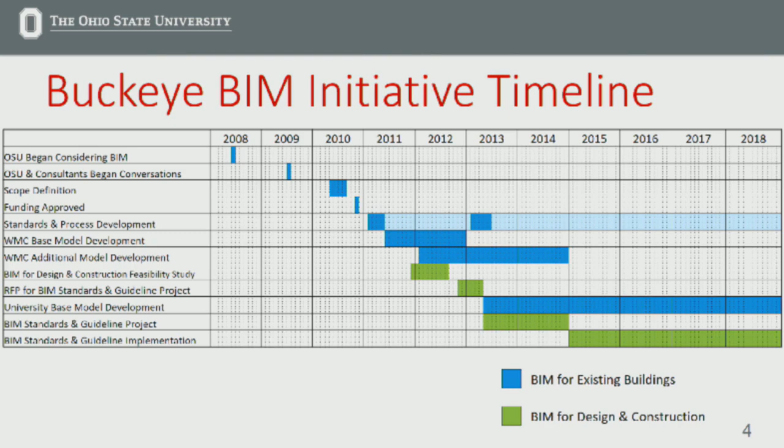So BIM for existing buildings will be much of our focus today, and we'll also cover a little bit about our BIM to BIM process. That's what we do with those buildings that come in from the larger projects, and how we get them standardized and into our system.

So a little background on the project. We started out like most people with maintaining our buildings in 2D AutoCAD. This was great for tracking space and our basic needs, but we really wanted to move towards a data-centric model, being able to understand the exteriors and adjacencies, and really having a database of information about our buildings.

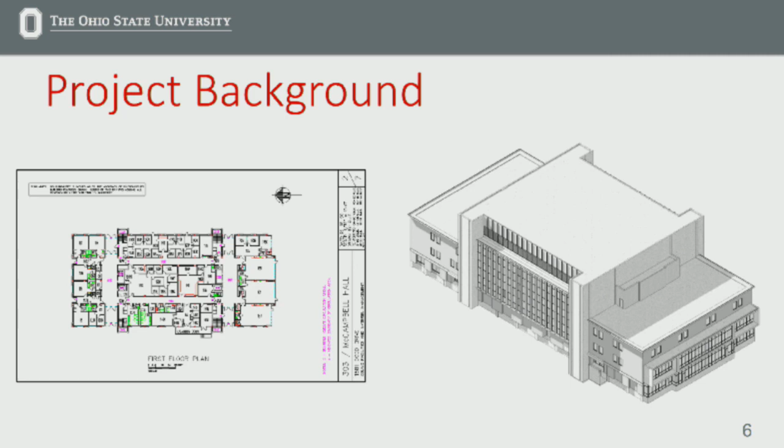So we're currently about 83% complete with the project. We have over 251 buildings and about 29.5 million square feet. We suspect this will take about 2 to 3 more years to complete our existing building stock, and that'll ultimately put us at about 35.5 million square feet.

So when we started down this path, we really had to ask ourselves, what do we need to model? What do we want in our models? And what's the stuff that we don't need? There's a lot of things that you can put in the models, but really what supports our planning and operations efforts. Our team has always been under the planning umbrella of the university, so we really focused on what helps our planners, and our general goal is how do we help people make decisions faster. But we also wanted to keep in mind what could easily be maintained. At the end of this project, we're going to have a lot of buildings, a lot of models, so we wanted to make sure it was reasonable for our team to maintain those going forward.

So we knew we didn't need everything that comes in a project model. It's not this design intent, work intent, or as-built, but it's really what we term as our as-maintained model, or owner's model.

These are the items that are in all of our base models. A lot of these were in our AutoCAD drawings. Inherently, we gained some things by going to 3D. But we've also added things like casework, plumbing, furniture, which we didn't track—like the open office areas previously—and also some equipment that was helpful for users.

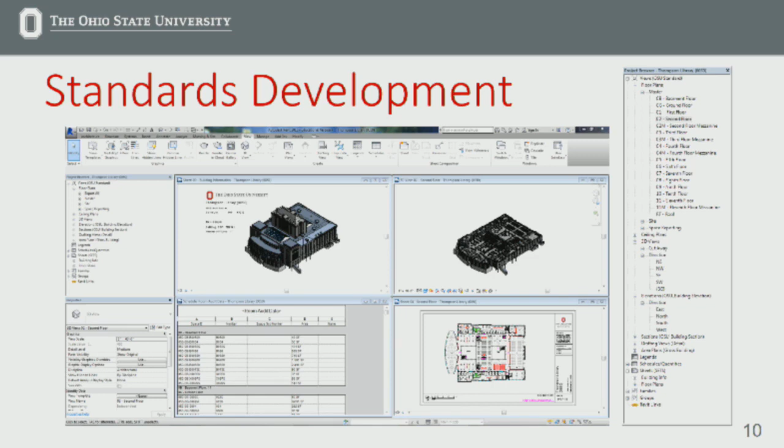This was really to help our planning teams as they started to transition and use our models. This would allow them to pull some quick pre-made views to do some of their work. We have some basic schedules, some room schedules, some equipment schedules, and obviously the standard floor plan sheet sets that you would expect to see.

We continued that standardization into all of our naming conventions too. So all of our floor plans, ceiling plans, elevations, all of those, as you transition from model to model, are all standard named. Part of the standardization is, as we knew we were going to have that large base of models at the end of this project, we wanted to make sure there was consistency from model to model, because we knew automation would play a role in our processes at some point.

And we carried the standardization naming into our family library as well. We settled on the MasterFormat, so this helps us to manage and organize our library, but it also keeps things consistent versus naming them in a descriptive manner, which can get kind of messy over time.

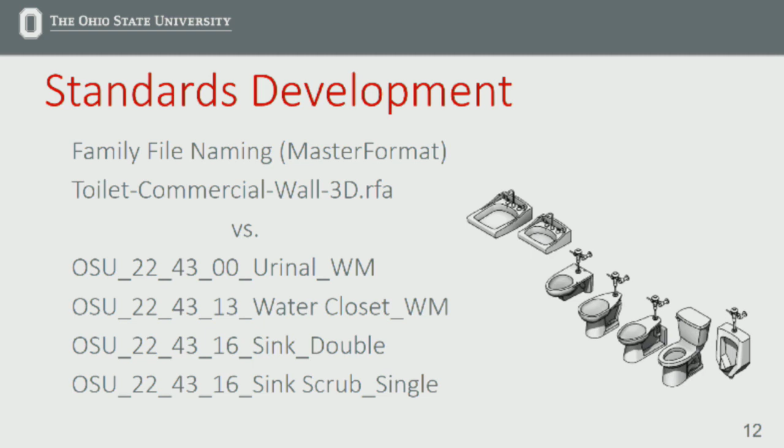We also, in regards to our families, thought a lot about what needed to be modeled. Did they need to be buildable versus representational? We settled on representational. We didn't need to know the exact make and model of the chair. Just a chair that looks similar to what you're going to find in the space is good enough for our planning needs. And the same goes with our casework and sinks and things.

They're just representative of the type of sink that you're going to find. It may not be that exact model. We also kept in mind, and tried to make as many of our families parametric as possible so they could be used in multiple ways.

But we still ended up with the amount of buildings that we have. We still have over 1,000 families, and we'll probably add more as we continue down some buildings that we haven't yet, types of buildings that we haven't modeled yet.

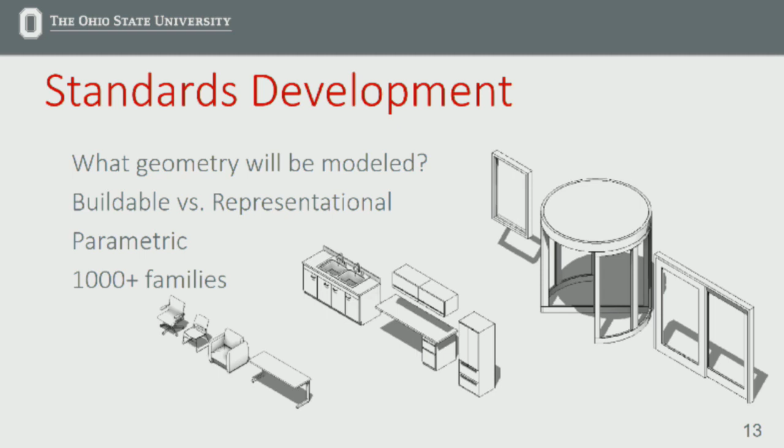So that initial gather phase, they collect our existing drawings, as-built. They go out and field verify. They come back to the office. They start building the model. Once that's complete, it goes through a series of audits.

The student starts to audit, and then it passes to Tracy for audit, and that kind of goes back and forth until Tracy says the quality of the model is good. And then it goes through the publishing process and shared out on our network and other systems that pull from there.

So with that ever-changing group of students, we've been at this for over 8 years now, so we've had a lot of groups of students. Highly documenting our processes was critical to keeping these models consistent as we go from year to year.

So we recently just moved to this web-based system, and that's also helped streamline the process. And with that, I'm going to turn this over to Tracy so she can talk in more depth about our processes.

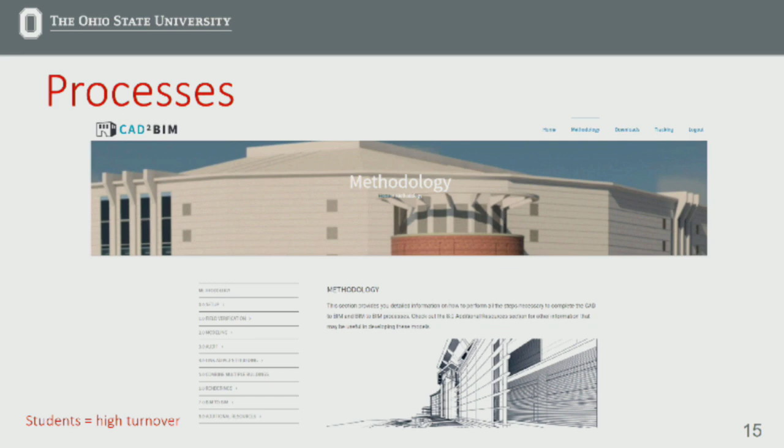After we train the students for a week in Revit, we go ahead and start with our setup process. So what I do there is I assign each student a building. I set up the folder structure, I set up the folder with the building name and number. I put the available AutoCAD drawings in there, and then I also arrange for the initial field verification.

So field verification is critical. It's one of the most important things that we do. If you don't do this right, it's going to take you longer to build your model. So I really stress that they need to pay attention and get the things they need to get.

So preparation is the first thing. What I have them do is go onto our GIS maps or Google Earth and look at the building exterior. Where is the building in relation to other buildings on campus? Are there any prominent features they need to model so they can make sure to get pictures of it while out there? They also download files from our archive site, like project drawings, as-builts, elevations, sections, that kind of information.

Next, they'll do the building walkthrough. But before that, during the preparation phase, they'll take the AutoCAD drawing and put several dimensions, usually 10 to 15 or so, within the model. They're dimensioning the length of hallways, the width of hallways, large rooms.

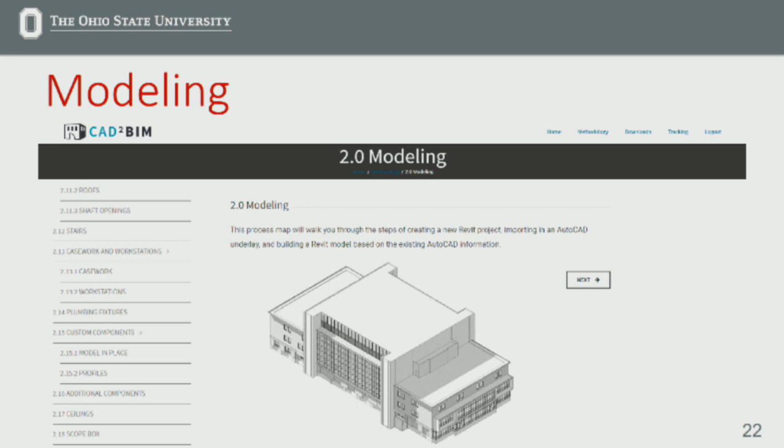When they're done with the modeling of the building, then they'll start putting in the room numbers. So this is where our space information comes from. This is how we track it. We have our room number. It's entered in here, and then Dave's going to talk about a tool that creates our space ID number, and that is where all our data is tied to, is this number here. So it's really critical that this is made correctly.

So the other thing that we do is we always have our default at 8 foot. Our space is at an 8-foot height. When our information is exported out and brought into our SIMS, our Space Information Management System, if that space is going through the ceiling and into the next floor, it's going to show on both floors in our space management system. So it's going to show on the first floor, and if the space is going through to the second floor, it's going to look like we have two room numbers in the same space.

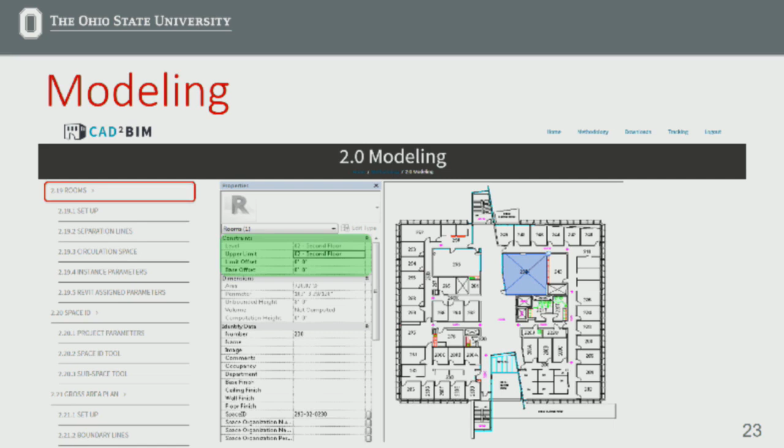So it's really important that they not change this information. So we've set it default at 8, which is a good height, so that it's not going to go through to the next floor.

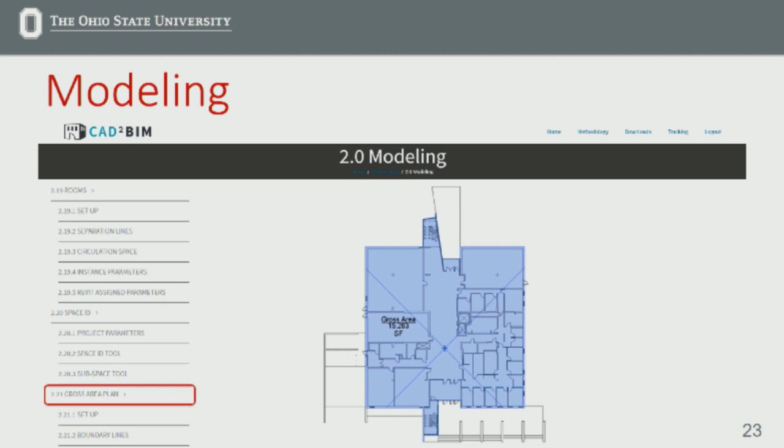We also do our GSF at this time, so we will do GSF for every floor. We have schedules already pre-set up within the model in our template, and so the schedule will take whatever GSF is on that floor. So if you have more than one, it will take those, it will add them and give us a gross for the floor, and then it takes all the grosses and it adds those all together so we have a gross for the building.

After they're done with that, they're going to set up views. So we have standard views that we require for every model. We have our site views, Project North, True North. We have our space reporting views. We have our cutaway views, and that's the example that's up here. Like Dave said, this is really important. We use this a lot in planning.

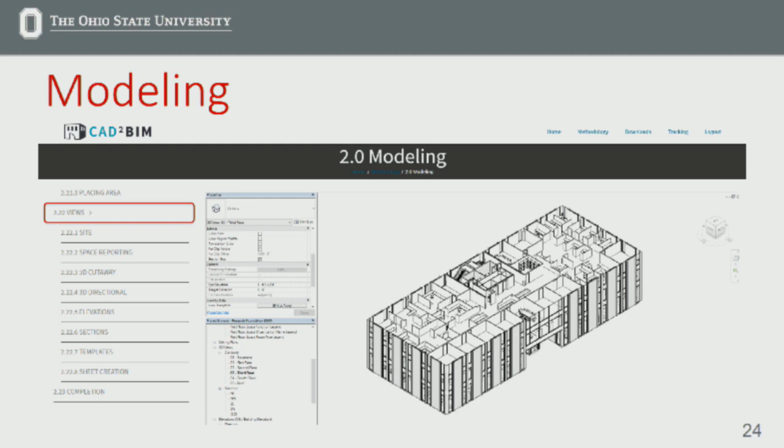We have our standard elevations, our sectional views. So we'll do a north-south section, an east-west section, and those are standard, so people can see how the building flows on the interior. We also have them apply templates. So we have standard templates within our project template, and these are standard view templates. And so these correspond with the names of the views.

So if you notice, we have the site views. We have a site Project North template, and we have a site True North template. We also have our cutaway views. We have a 3D cutaway template and a 3D directional template. And what these do is they set up the views so that they're exactly the same in every model. There's certain things turned on in one view and certain things turned off in another view. So all the students have to do is just apply that information to the views that they've just created.

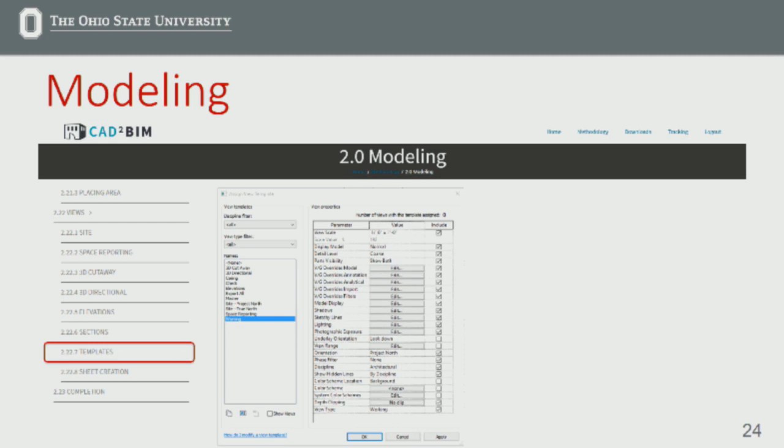So after this, they go through and they do an audit. So first they're going to look at the model in 3D, rotate it around, make sure they haven't missed anything, there's no gaps and there's no holes, there's no shafts going through the roofs or anything like that. And we have several tools that we use to do an audit with.

Now, when we first started this process, I would do the audits and it was all visual. Everything was visual. And sometimes it would take anywhere from several days to a week to audit one model, depending on how many floors there were, how many rooms per floor, that kind of information. But now that we have found some tools that we can use and automated some of that process, it now only takes several hours to audit a building.

So the first tool I'm going to talk about is Solibri. This is a model checker software that checks basically geometry. We use this to check our spaces to make sure they're not going through to the next floor. We check to see if there's double spaces, if there's missing spaces. We check to make sure that floors aren't running into walls and walls aren't duplicated. There's a lot of geometry that this checks for us automatically.

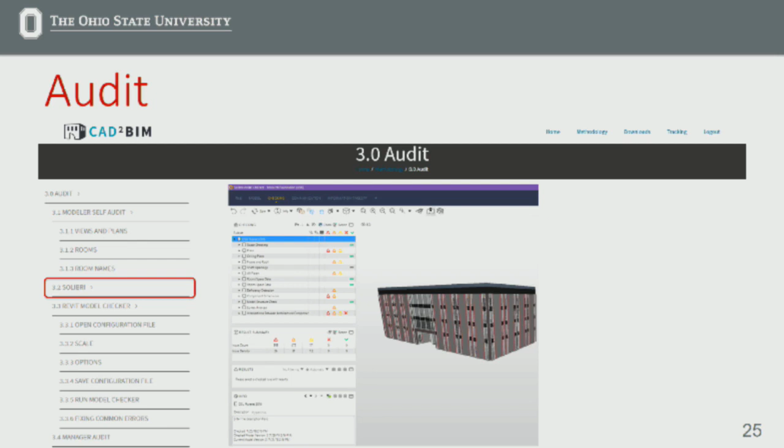And then I just have to go through and verify the errors that Solibri puts out. So the red triangle is critical errors, the orange triangle is not as critical, and then the yellow triangle is less critical. It also gives me a count of how many errors are in the model. It'll also tell me where in the model that error is. So if I select the error, it'll highlight in the model. So right here I'm showing two columns together. It'll highlight where it is in the model.

Down below in this information section, I can find out what it is, what type of column it is or what type of component it is. It'll give me the name. It'll give me the location. So it just gives me information about it. So then I can go into the model and make the correction.

The next model checker we use is actually the Revit model checker. This is a free tool that you can download. And we have created a rule set that we use for this that is specific to the things that we want to check. And I didn't mention that about Solibri, but we also do that with Solibri. We have our own rule checker. We didn't use the out-of-the-box stuff because some of the stuff it checked for, we didn't need to have that checked. We wanted it to check for specific things, so we made a specific rule set to check the things that we care about, such as spaces and clashes with walls and that kind of stuff.

So in the model checker, the only thing the student has to do is put in the correct scale value. With our templates, all of the templates will have the same scale in every view. It doesn't matter what view you're in. It's like the project has one scale and you have to apply that to every view. So that's the only thing they have to change.

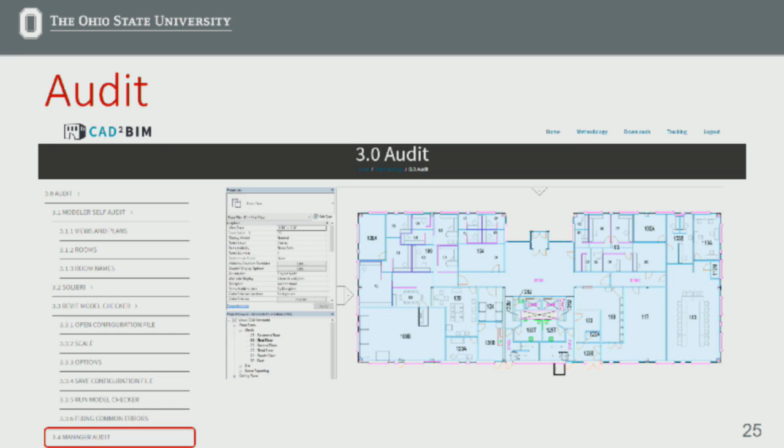So then after they're done with their audit, they send it to me to audit. I do exactly the same thing they just did. I do a visual audit, I run Solibri, I run the model checker. I also have an audit process that I follow, which is also on the CAD to BIM website. And I will document things that they have missed.

So if I'm going through and I see, you can't really see it on this slide here, but these closets here are not being shown as having a space in them. So on my screen, everything's light blue, except for these closets, they're white. So I go ahead and document, and I say on the 4th floor, there's closets missing. I do not put the room number in here because I want them to check the whole floor. A lot of times I will put the room number in if it's specific just to one room.

So like the example down here below, it's the 1st floor, it's room 119, and I say, hey, it's missing the rolling window with the counter. This is something they missed, but was something that I was able to pick up because we had the 360 camera pictures. So those, I just can't tell you how helpful they are. They're like gold. They're just amazing.

So after the model is done, the audit process usually goes back and forth between myself and the student 2, 3 times, hopefully not 4, because if it's 4, we're going to have a conversation. But hopefully it's just 2 or 3 times, and they'll fix the errors. I check it, make sure that they fixed what they're supposed to, that they didn't break anything else while they were fixing it.

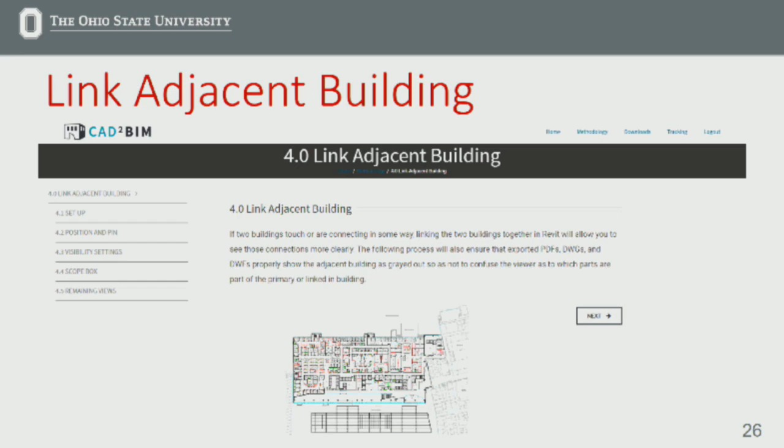So then we link in adjacent buildings. This is really good for planning because if someone's not familiar with the campus, it just gives them a visual of what is next to that model in real time, real space.

We can also do combined building models. So this is where that project base point comes in. We can use this to have the buildings placed exactly where they are in the real world because we have those GIS coordinates in there. So this is our Ackerman complex that has 8 buildings, and we were able to make this so that they could have a view of the whole site.

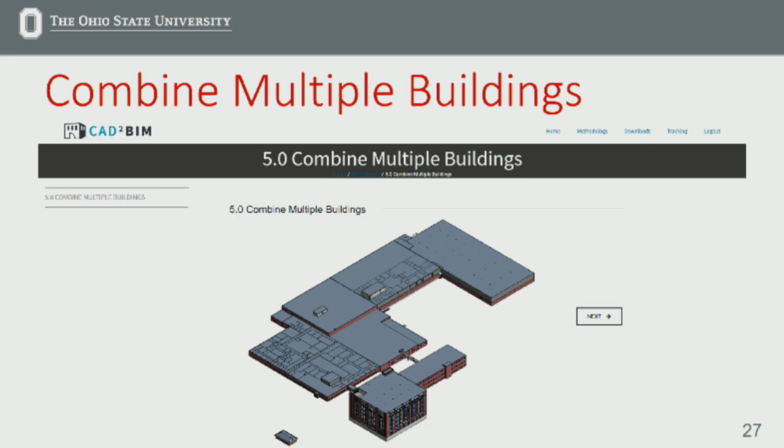It gives our leadership a chance to see what we're doing. It also gives other departments a chance to see what we're doing. If we're telling them about what we're doing and we give them the website for our gallery, then they can go in and look, and then it spurs thoughts in them like, hey, how can we use this model? So we've had a couple departments that have come to us and asked us to help them start placing content that's important to them into a model that they make to link into the architectural model.

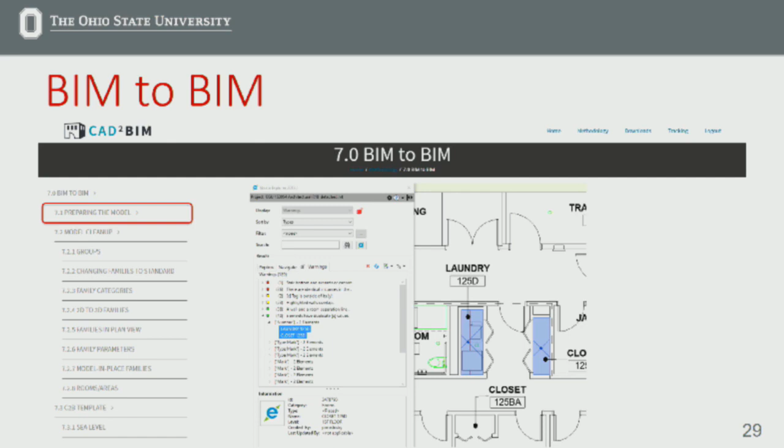This is showing how Ideate Explorer has shown that there's 2 spaces on this floor that have the exact same number. So now I can go back to the room numbering prints and find out what is the correct number for this room.

Then I also need to make the levels and the views the same. So if you see on this side of the screen, this is typical of what I might get in from an architect firm, and this is how we need to make it look so that it's set up for our environment.

When that's all done, it's all cleaned up, we bring it into our OSU template, so that way it has all the views set up, it has all the view templates in there, it has all our families and things in there. And at this time, we also double check to make sure that the sea level is correct. It's very, very important that we have the sea level correct because these models are feeding into our GIS and we want the campus to be correct.

We also have additional resources on the CAD to BIM website, and this shows our standard naming conventions, how we name each floor. If a student has a building with a mezzanine or with a tunnel, they're going to name it according to our standards so that every building looks the same. We have levels of model development. So we have everything for our base model in there, and these will be things that'll be in every model regardless of whose model it is.

We have residence hall models. So Student Life has asked us, hey, we want to know how many beds are in a room. We want to know, is there a wardrobe? Is it built in? Are there dressers in there? Are there bunk beds or are they single beds? So we have that. That's additional information that's added basically to the base model, the things that they've asked for.

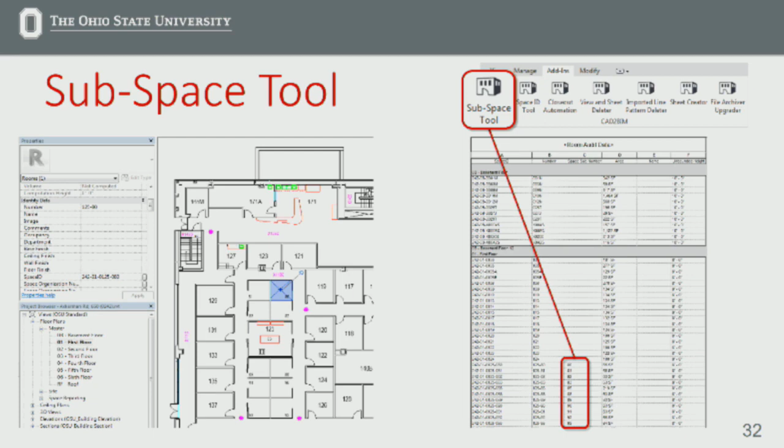We also use this in lab benches as well. So the drawing can start looking messy, so this helps tidy that up. But it also populates this field that is then pulled into our space information system. And previously they would have had to type this, and that just opens up to a lot of errors. You know, if you have a whole floor of cubes, by the time they're manually typing them, if they get out of order or whatever, it can cause data issues downstream.

The next is our space ID. As Tracy mentioned, all of our spaces have a unique identifier across campus, so we call that our space ID. It's comprised of the building number, the floor, and then our room number. And previously, these would have to be all hand entered. So this tool basically still allows the user, just like before, to enter the room number.

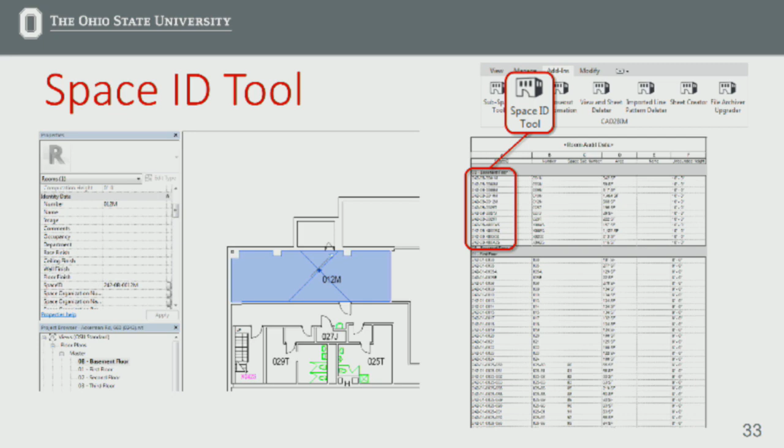When all of the room numbers are entered, they run the Space ID tool, and within seconds it creates all of the space IDs by pulling different parameters that are already in our models and concatenating that number. So this drastically improved the time that it takes to do that. In a large building, this could take literally days for them to sit down and hand enter. You know, if we had a 23-floor building with a lot of rooms, that's a lot of work and very prone to human error. So this has really streamlined that process.

The Closeout Automation tool, this is used both as buildings are transitioned, and it's also used daily as we make renovation and construction changes in our models. So at the end of any change, we run this Closeout Automation tool. We always provide our users a PDF, the DWGs from the model, and an IFC. So this tool really allows us to do that all in one step. Previously, we would have had to go into the model and export one file type, then go back in and continue that till we got everything we needed. This allows it to be in one step.

The view and sheet deleter, this is really a tool that was designed for our BIM to BIM process. As Tracy mentioned, a lot of things come in those models, so every view and sheet that was ever used throughout the course of that project comes in those models. This tool allows us to, through the dialog, pick which items we want to keep and which ones we want to purge. So basically which ones have the geometry that we really want and which ones are extraneous. And it allows us to check those and literally delete those within seconds once we run this tool. So that's really helped the process in scrubbing our models and getting them more standardized as we get them from projects.

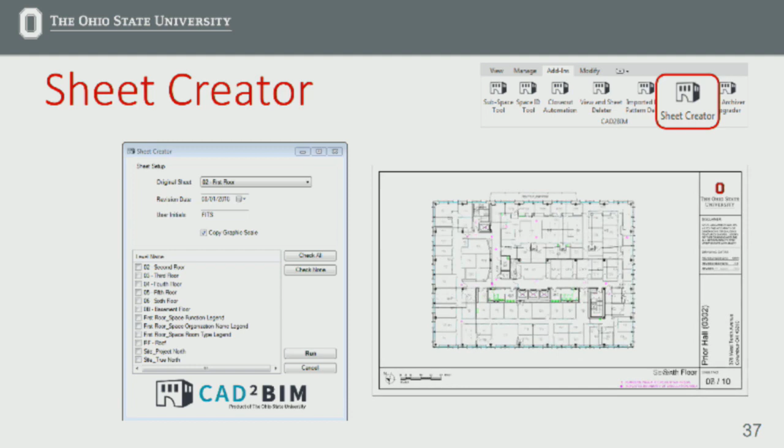The sheet creator tool allows our users, as we're creating these models, to basically set up one sheet, one floor the way that they want it. They can place one floor, and then from the dialog box, they're able to choose which other views in the model that they want to create sheets for, and then populate the revision date and their initials and things that we want populated in this title block. And once they run that, all of the sheets are created within seconds, literally, once they hit the run button, which saves a lot of time because they're not manually setting up all of the sheets.

And then that also improved our accuracy of the building stacking. When they were doing this manually, the building wasn't necessarily, as you flip through the sheets, stacking exactly. This puts the building footprint exactly the same spot every time, so it's helped in that as well.

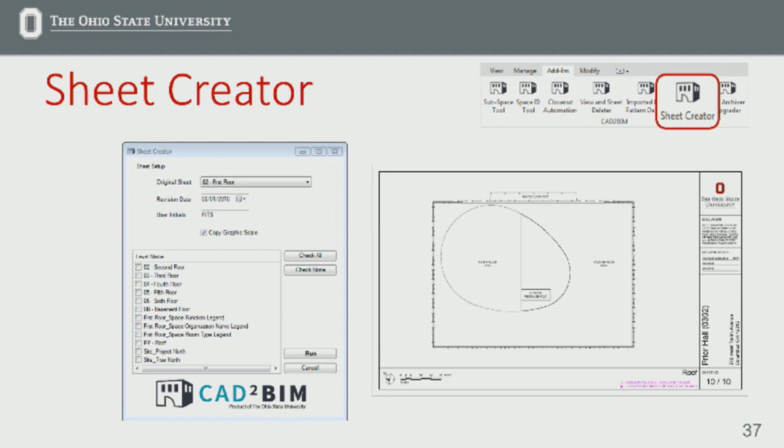The file archiver upgrader is really a valuable tool from my perspective if you're a building owner. Obviously, from year to year, we upgrade what version of Revit we're using. So this allows us to do a mass upgrade instead of opening and saving, upgrading and saving each model. It also suppresses a lot of the errors that occur during that upgrade, especially with our linked adjacent buildings. But basically, this tool allows us to point to our source files.

In our organization, we have a working network location and a public network location where the other systems pull. So we kind of have that behind the scenes, so we can point to that. It will create an archived copy of the current version in case something occurs during the upgrade, so we have a backup file to go back to. And then it will upgrade the files in place. You also have the ability to populate that other directory in the public location through the same process.

Likely, with the amount of models we have currently, it would have taken over a month for somebody to sit there daily opening and closing, saving models. So with this tool, I'm able to trigger this before I leave for the day, let it run all night, and then come in and deal with any issues, address any issues the next day that we've had.

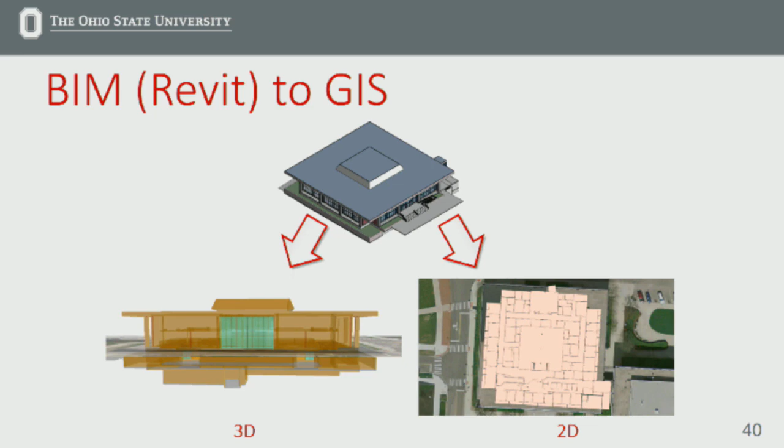We're also working on trying to get our data directly out of BIM to our GIS. Basically our goal is to get both 2D and 3D GIS based on our models. Our current process for that - Larissa Kruger is our GIS manager, she's also within our department, so we work with her. If you have any detailed questions about the GIS portion, she's a really good resource for that.

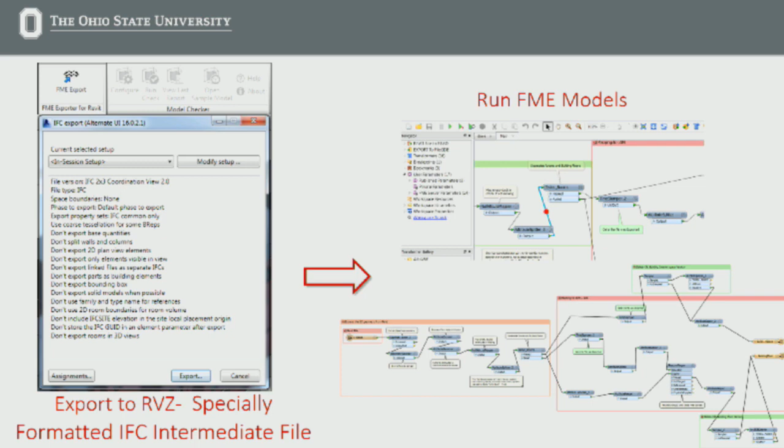So currently they're exporting the RVZ file. They're running that through a specialized FME script and pulling the data that they need out of the models. This is really still a work in progress. Some of the challenges are that BIM is much richer in detail than GIS. GIS has only recently become fully 3D. And there's other issues - not all of the data is contained within the models.

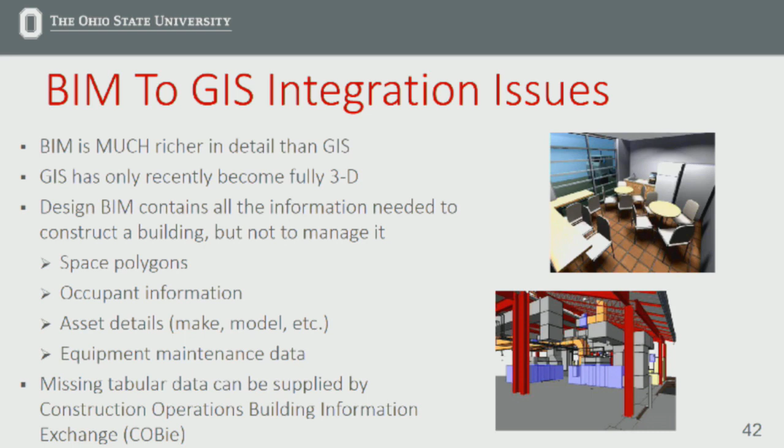Revit inherently knows what spaces are, so coming directly from our models, there's not necessarily a polygon coming out. And there's also supplemental data as we get projects in - things that are not necessarily contained in the model, but may come in like COBie sheets.

So next steps for us, we're in the beginning phase of implementing Revit Server and Clarity. We believe this will create additional efficiencies within our operations. We have departments throughout the university that are beginning to build on top of our models.

So we have departments that are creating their own MEP models. We have departments that are tracking equipment. We have a group that is starting to look at tracking some interior things, artwork and various things like that they want to keep track of.

So we're sharing these models, but our organization is set up with a lot of different IT networks, and this becomes a challenge as you're trying to manage getting all of their models back in one place to share with the rest of the organization and project teams. So Clarity will improve that process and allow us to share those models much easier.

It will also further automate our processes. There's a possibility that we can run that closeout automation automatically. We can start pulling schedules across the whole of our models instead of opening each model and pulling that out. It will provide a dashboard with some health checks for our models that we can monitor if something's going wrong with our models. It will also provide some 3D viewing capability that we don't currently have today.